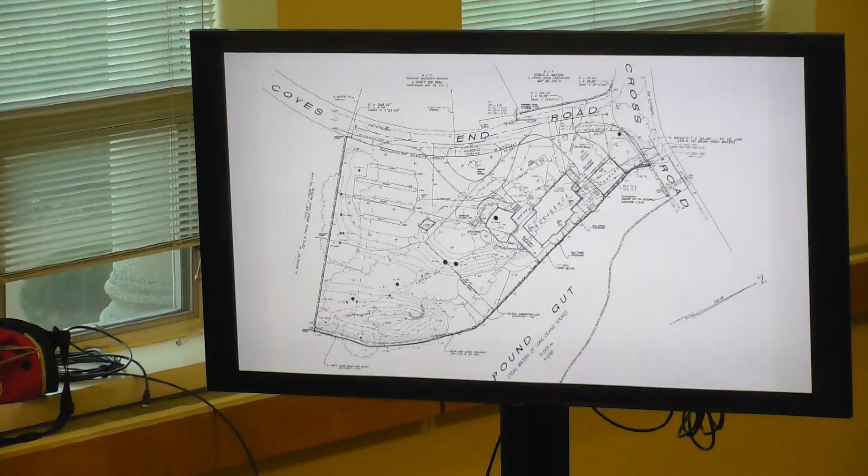This is the survey, and I have a detail of what this looks like a little later. You can see it is a roughly triangular-shaped lot. The residence, which is old and predates zoning, is very close to the water line, and the property line is the water line at this edge, which is Pound Gut. It is towards the tip of the triangle at the intersection of Coves End and Cross Roads.

I have some existing floor plans of the lower level - this is the basement ground level, which leads out to the driveway right here. This is the first floor, which is the principal living floor, and then the second floor where there are bedrooms, etc.

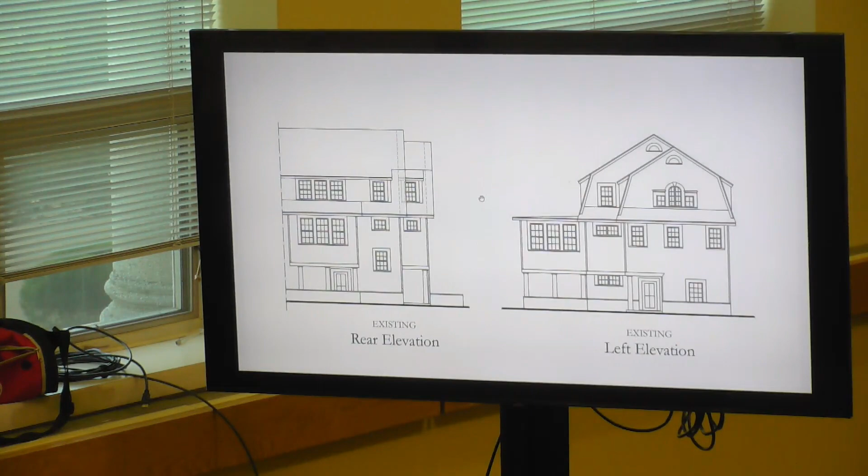Existing elevations, which we can come back to for reference, and then a zoning chart.

On the zoning chart, the interesting element is that between the existing and proposed there is no change, including the side yard, which is currently 0 feet. We are not proposing to change that, but we would like to build that small addition 17 feet away from the property line.

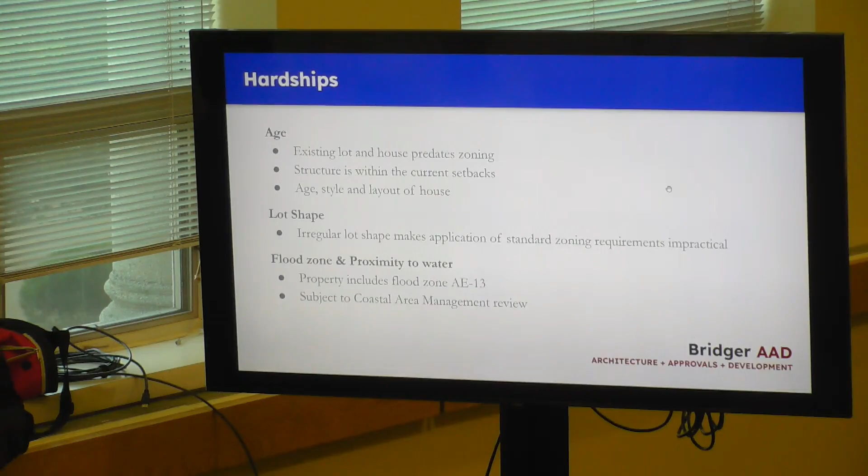The hardships, as I mentioned, are the age of the lot, which predates zoning. The structure currently exists within the current setbacks, and it's an old house. We looked at options for where to put the elevator, but given the existing layout, the character of the house, and the substandard basement, it would be difficult to get circulation to an elevator anywhere else on the house as it stands. I have some photographs of that as well.

It is an irregular shaped lot, nearly triangular, not actually triangular but pretty close. There is also some flood AE 13 zone — actually the whole property is in the AE zone, subject to coastal area management, which, if we get approval here, we are on their agenda for as well.

Our requested relief, as mentioned earlier, is to be able to build at 17 feet instead of 25 feet. It is currently 0 feet from the property line — the house is on the property line in some cases.

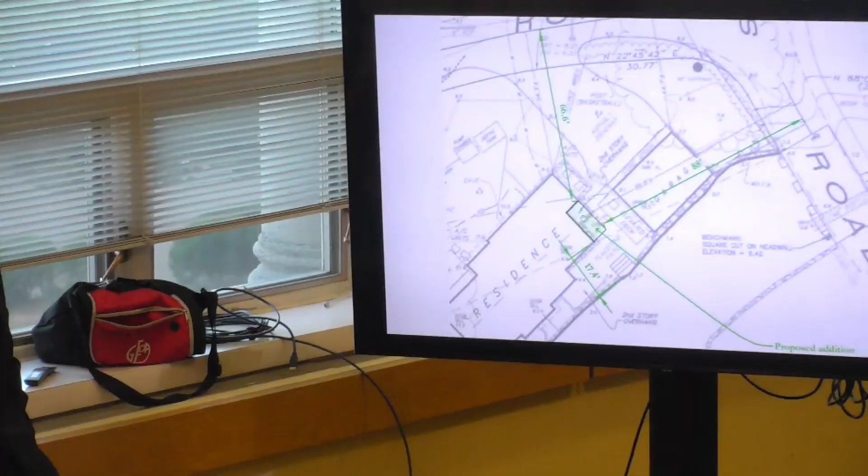This is a blow-up of the area on the survey, and you can see what's going on. There is this little open corner, and we'd like to fill it in to accommodate the elevator and staircase. These are my dimensions, not as precise as the surveyor's, but approximate — about 17 feet here, roughly 88 feet to the center line of Cross Road, and 66 feet to the center line of Coves End.

Woody, one of the comments — and I'll bring this up later — one of the comments Woody expressed on my drawings was that it wasn't exactly clear what we're looking to propose, so I'm going to drive that point home with a couple slides. Let me know if you get bored.

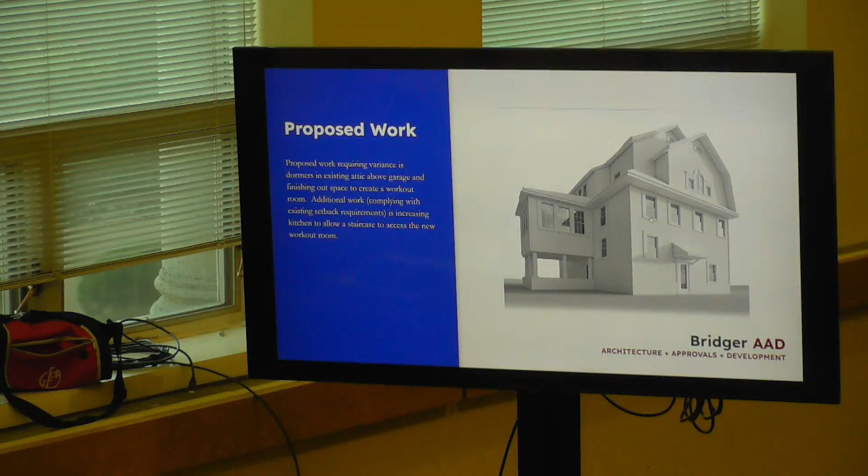These two windows are basically in the staircase, and the elevator would be where the existing staircase is now. A couple of floor plans depict this further — elevator here, new staircase wraps around.

This is the driveway, or ground floor, or basement level, whatever we'll call it. The first floor plan shows the kitchen and main living area.

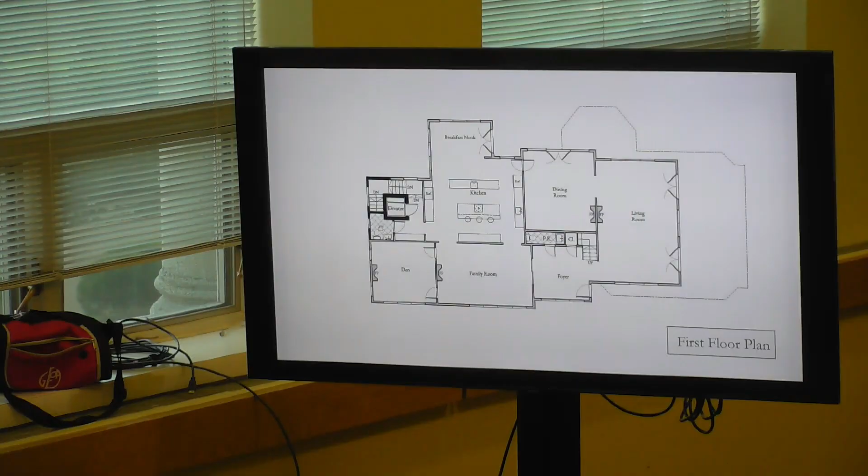We have to reconfigure an existing powder room, which is approximately there now, but we're tucking the elevator in and wrapping it with the stairs. That stair does not come up to this floor — there's already a staircase here if anyone needs it, so we're not duplicating that. But we would like the elevator to get up here so the homeowner could get access to the bedrooms.

Is this home FEMA compliant now? Is this home raised? No, it is not.

Do you have an estimate on this total project? The elevator project is about $100,000 or $80,000, something like that. Okay.

Sorry, I think we're almost done. But this is the proposed elevation. So basically, this L here would be new, and this would be new.

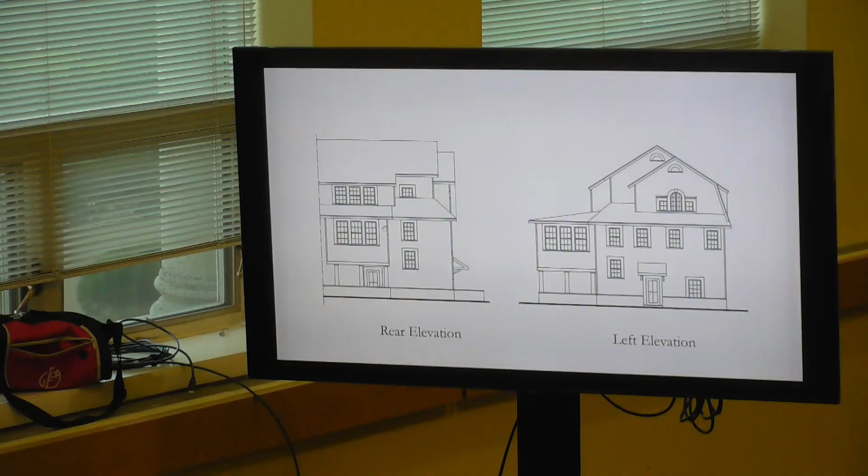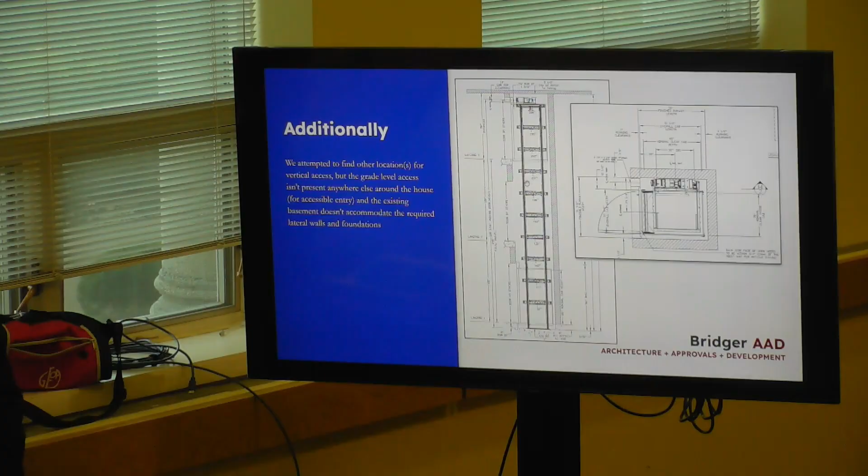Just a final point: given the technical nature of an elevator installation, we need appropriate shear walls, structurally sound, that can manage the push and pull, especially on the rear wall. This would be connected, and there's just nowhere else I can figure out how to do it on this house.

Staff gave two questions, and the first is the house sits very close to the water, and was asking about the depiction of what we were requesting on the plans. Hopefully this is a little bit beyond what you guys have in your package, but I hope this clarifies what we're actually trying to get approved, which is the addition for the stair.

The last question was the closest neighboring house appears to be 22 Searles. Are there any potential negative effects from the proposed addition? My response would be, I don't think so, because there's already impervious patio there.

We're not increasing the impervious surface. It's difficult to see this from any real street perspective. We don't think this affects anyone negatively in any way, shape, or form. And that's it, thank you. That's my presentation.

Any questions? In terms of the standards we need to identify under state law and local zoning, one is that there's something unusual about the property, and I guess what I heard is the irregular shape of the lot. The house was pre-existing, right, and you're right on the water, et cetera.

But then the next step is that that unusual configuration of the property creates a hardship. And what I sort of heard was accessibility, something like that, but can you elaborate on why, if we didn't grant you this variance, that would create some unusual hardship related to the use of this property?

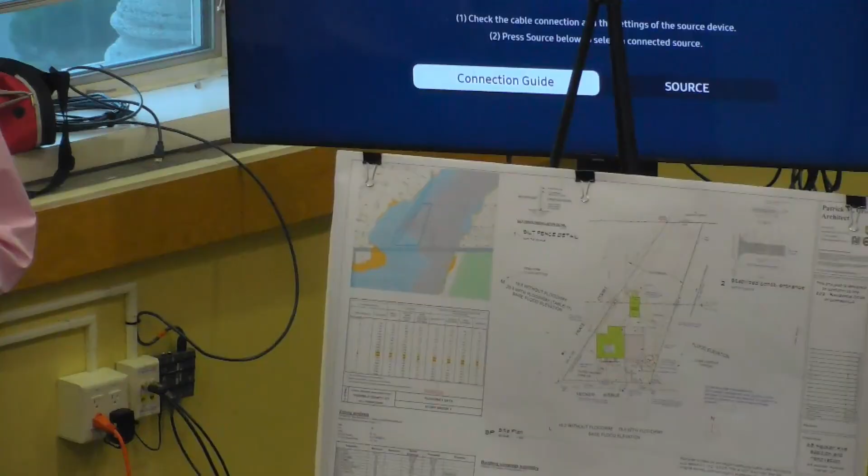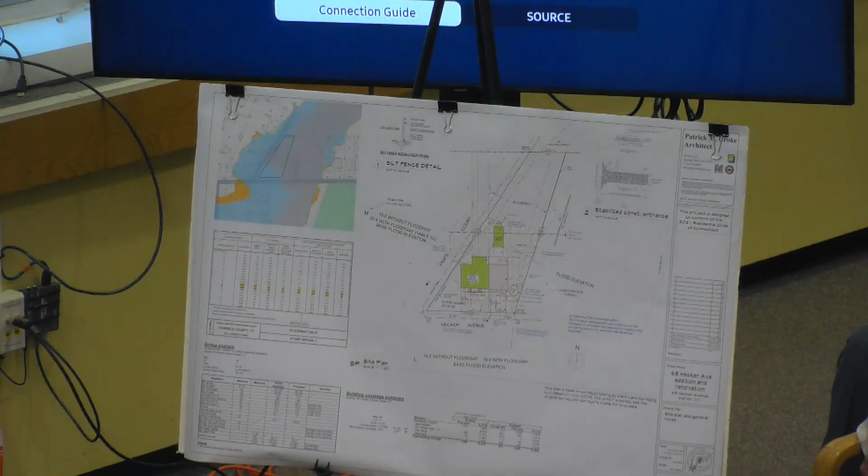The lot itself is a very unique lot on this street and in this area. It's a tapered lot with Hecker on the front yard portion and Friet, a small road, on the left side. Friet is essentially a large driveway, but it's considered a town road or a public road. So the setbacks from the center line of that road come well into the property.

Nothing can be done on this property that's not in the flood zone without a variance.

What we're looking to do with the house is to create a second story. The current house is a 3-bedroom, 1-bath house. The new house proposed is a 4-bedroom, 2.5-bath house. The 1,250 square foot first floor plus the finished basement totals up to about 2,500 square feet.

The proposed renovated house with the additions is approximately 3,000 square feet plus the garage, so it's not much larger than what was there originally. We're just trying to replace the area that was lost in the basement, because that needs to be filled in and brought up, so it's no longer a usable basement to meet the flood regulations.

We have an application into the Planning and Zoning Board, but they requested that we come here to your board first to apply for the variance.

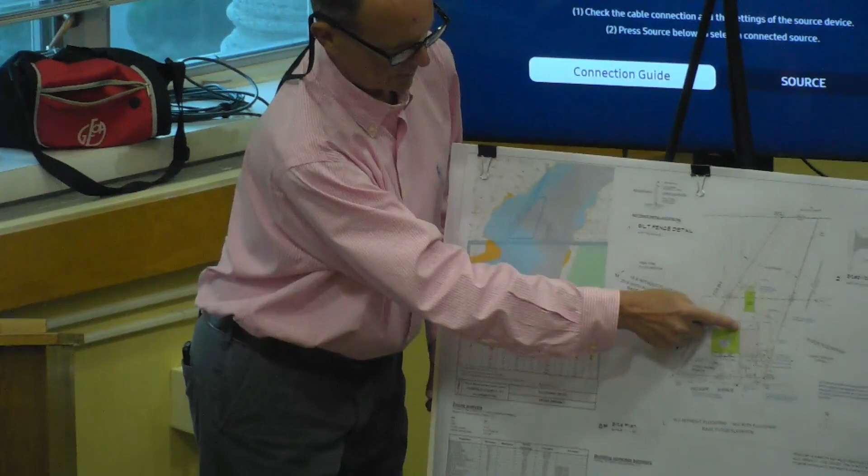The existing structure is shown in green, and we're proposing a second story above all of it except for the bump out in the back. The hatched area is the garage with a living space above it. This smaller hatched space behind it is a first floor deck.

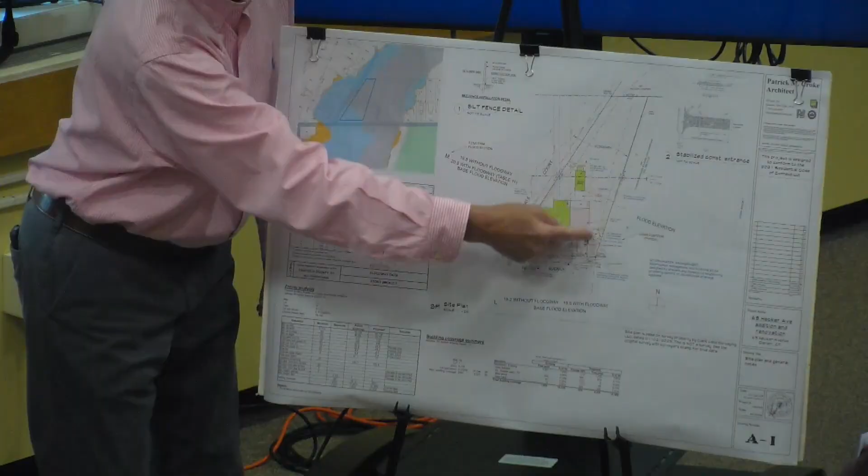The existing garage behind the house is being removed and restored to a lawn area. The orange hatching shows the flood area. So any additions on this other side, which may not require a variance, would push us into the flood zone where we would not be able to meet the 0.00 flood rise restrictions.

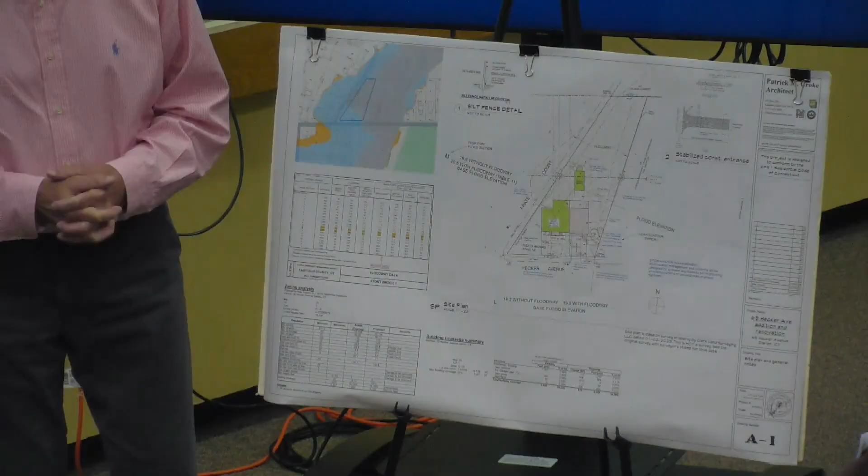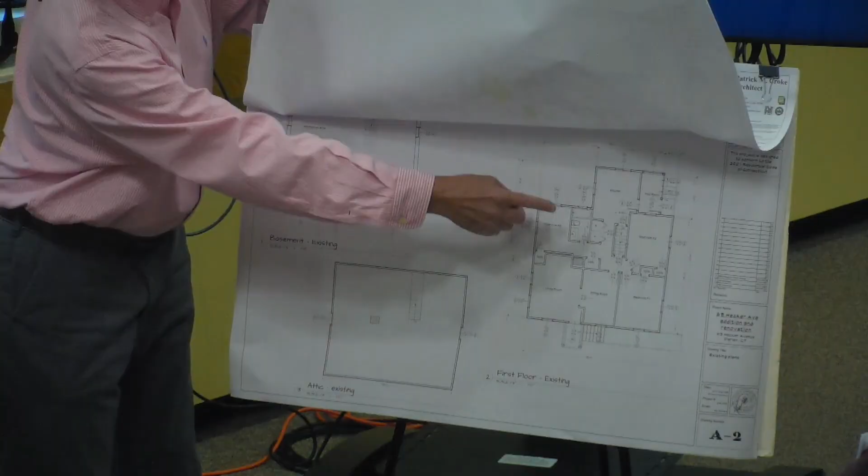In our package, we've included the existing floor plans. As you can see, this is the finished basement, which has a fireplace down there. It was used as a playroom, and the first floor has 3 bedrooms and 1 bath. The attic was just an unfinished storage attic.

The existing elevations, again, you can see from the photographs, it was a modest house. Patrick, did you guys look at just tearing this down and starting over? It was discussed.

Mr. Rahman decided to pursue this option. I think tearing it down and reconstructing it would put us more into the flood zone and have higher restrictions on that. That's what I can't tell. I can't tell if it does. It looks like the buildable area is there for you, but I can't tell on this where the flood zone hits.

John, can you tell? There's some survey from our documents that may be clearer. It looks like I think it's all the red area here.

Am I interpreting this correctly? So the entire thing is a flood zone? The entire thing is the flood zone to right here. All that red? That's what I want to understand. So all of this is flood?

It may be clearer on this photo. I believe so, yes. So if that's the case, Woody, keep me honest, I think that's correct. So then you're looking at our buildable area is now this.

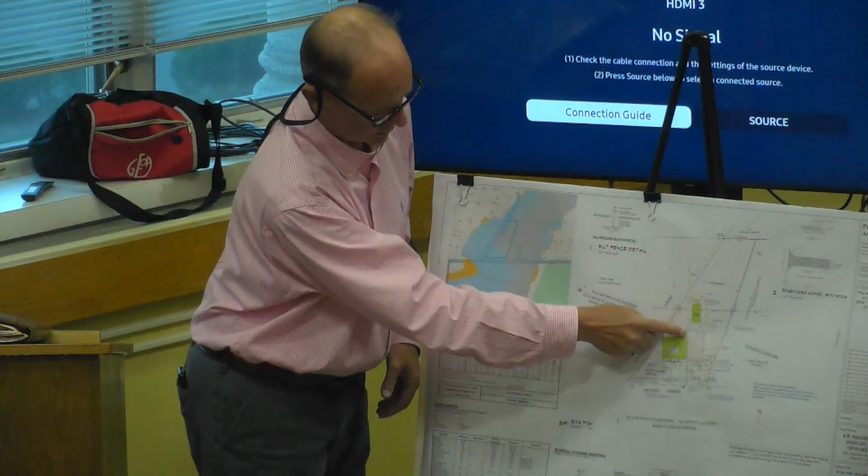You can see on the survey and the site plan where the line is - a little more than half. So of the square footage of the house, from this corner to this corner, it's about half, so 1,250 is the house, roughly half, so let's call it 600 square feet.

But is the basement legitimate, like property card square footage? Is it finished? Probably not, right? It can't be. Maybe it is, I guess I shouldn't say it can't be. There's, I guess I'm trying to understand if it's 1,200 feet, and even if the basement is legitimate or not, or somebody just refinished it, it's irrelevant.

Even if it's 600 square feet, that's 1,800 square feet, and this new house is what you said, about 3,000, little under 3. And this is a 16,000 square foot lot?

Okay. Did you speak with any of the neighbors about what you guys are doing? I did not. Did you speak with any of the neighbors? Okay. Obviously, they all received notices. We offered in our cover letter with the notices that they can reach out if they have any questions, and we did not hear from anyone.

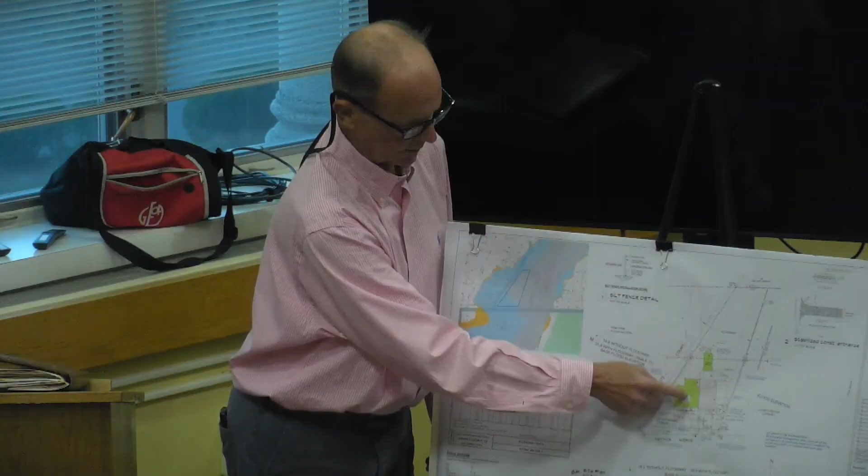And have you looked at making the second story setback to... We looked at options for relocating that second story, bringing it back in this way, but then it pushes out this way, and you end up with a similar situation back here where there are fewer trees. I think it's more screened in here. Plus it's an awkward-looking house with the two-story section that bumps down, then an addition off the back.

So it's choppy. So you could add the second story and get it out of the setback? No, you cannot - it does not go out of the setback, because it would be back in here. Oh, should be okay. Back in here, so it still requires a setback variance. We're gonna have to go above this, which we're not now. Is that going away? No, it stays, but it stays as one story. Oh, this is a two-story here. Okay.

I think you could get a second story there. Okay. Want to say this?

Randy, anything else? Could you just summarize again the hardship points? The hardship is the shape of the lot - as it tapers to a smaller section in the back, the setback on this side comes in more as you go back. Freight is a very narrow street, which pushes the 50-foot measurement from the center back well into the property - that's through half of the existing house. The flood issues, including floodways, that's moving water. The water moves at 4.2 feet per second, as per the code here. It's just under the 5 feet, which gets us into a more restrictive flood zone, but it is still a moving river that we need to deal with.

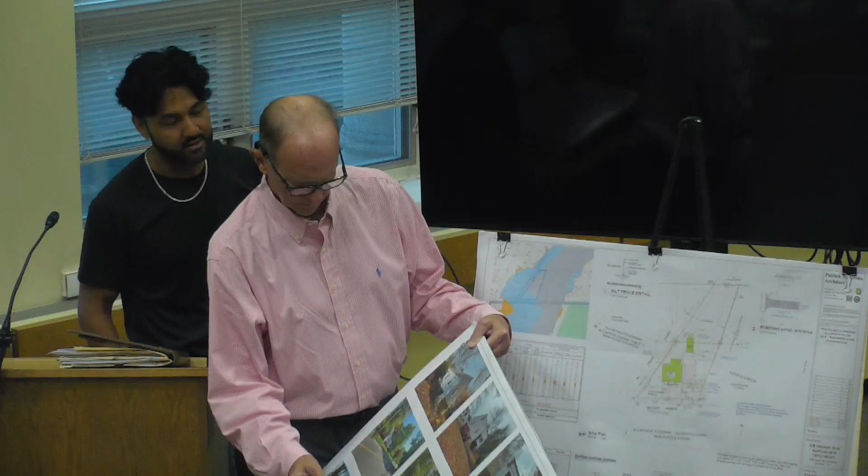He's asked to show where the door is located. It's described as an actual walkout door, smaller than full size, not like Bilco doors. It's confirmed that this door enters at the ground floor of the basement.

A board member asks about stairs going up near the door, noting that to bring in tons of crushed stone and concrete for the new 4 inch slab, you'd have to go up 5 stairs. The builder clarifies that actually you're going down 5 stairs from that door, not up.

A board member jokes that the builder would know since he's a builder. The builder clarifies he's not a residential builder. The board member says he's 100% correct that it's not an easy task.

The builder asks the board for clarification: where the new stair is going at the front, if they cut a hole in the foundation there and patch it back in as part of constructing the stair, would the board consider that a reasonable option? Another member suggests John may not care about that, just that it's a big fill.

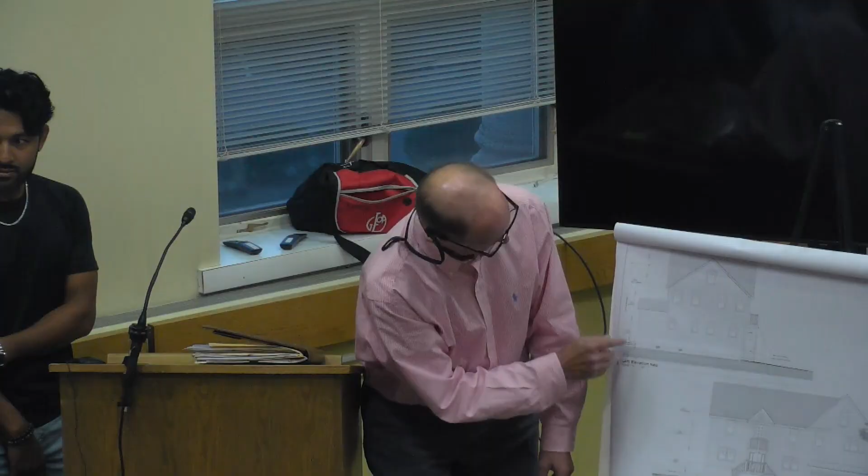So this is it, it's 29/2. Looks like this is dated 6/14. Right, but then we had the surveyor update the average grade, and it came up a little bit from what we had assumed. Okay.

All right, while you have that elevation up, there's a feature over the garage door that's a little bit in the front setback. If that's an issue, we can come up with other options. We're just trying to break up that mass between the top of the doors and the bottom of the windows. It's higher than normal because of the height of the garage.

But we can come up with other options if that's an issue with the setback. Okay, pay attention - can you, and maybe the rest of the board is clear on it and it's just me, explain the further hardship with the flood zone by rotating and putting the house in? I get it, it's still in the flood zone, but putting the house in the zoning buildable area, what is the further hardship versus building in the flood zone right now? I'm not clear on that, maybe you guys are.

The more construction you put in that flood zone, the higher it raises the water, that's the simple answer. Okay, so what is the impact specifically to your project then? Is the impact that they say no, you can't build this in this buildable area? Correct, if we're above that 0.00, we cannot build it. That's the only option - you'd have to raise it more, or they can say no, you can't build it.

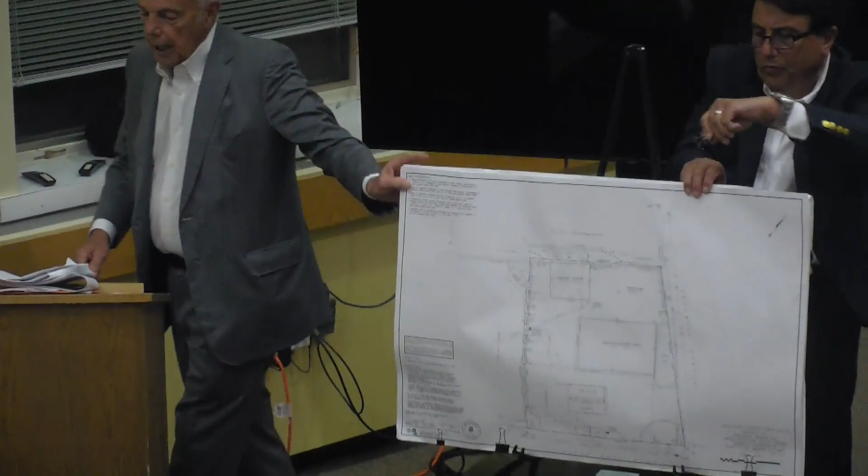Here, and you have an existing garage in the back. The existing garage is an additional 1,020 square feet, so that on the site right now, there's 3,750 square feet of building area. The storage building, which is at the rear or northerly portion of the property, is between 2 and 3 feet from the rear property line as it exists. So it's certainly within the setback area that exists back there now.

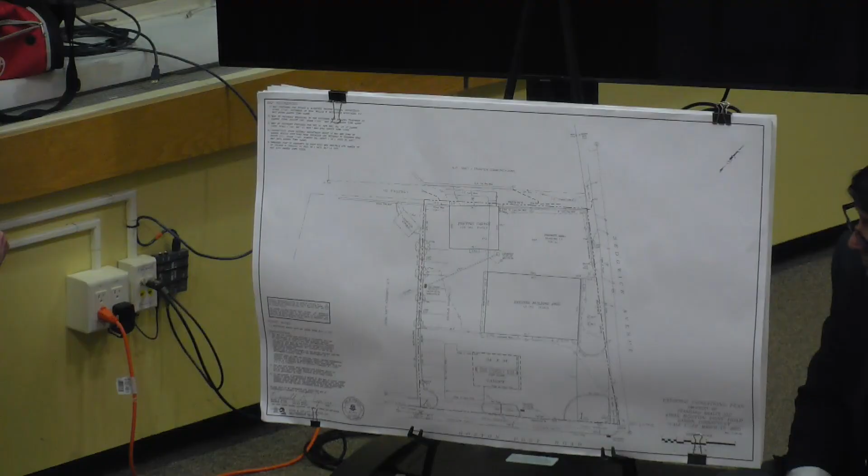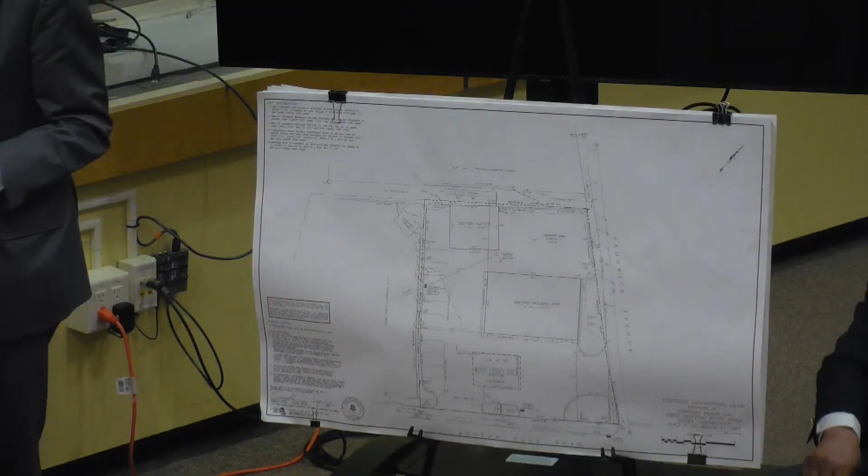And I want to point out that on the site, and even in the picture that Woody attached to his report to the Zoning Board of Appeals, you can see there are existing 3 pumps. It's not 2 pumps as was shown and indicated on some of the plans. The canopy that's there is now 816 square feet. And it's noteworthy that the district to the north of the parcel, although it is a residential zoning district, it is owned by the Frontier Communications Corporation, and they have a building there that's used for commercial purposes, and quite honestly, it will continue to be used that way into the foreseeable future, which has an impact in terms of evaluating how this lot is configured.

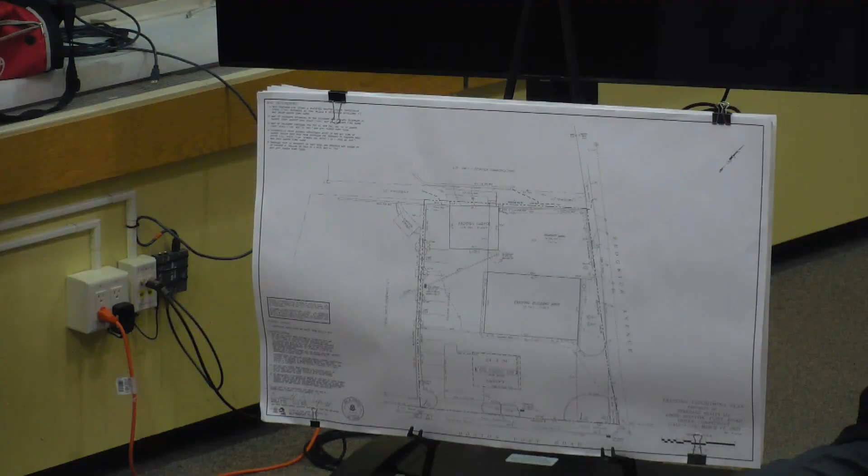I think the impetus for the proposal before you and the intent to remodel is that the operator who is there now is about to exit. There will be a new operator, and it's an opportunity to create what honestly will be an aesthetically much more pleasing construction on the site.

It will be safer, it will enhance mobility on the site. The proposal is to have one building of 2,800 square feet, which is a reduction in the square footage of the 2 buildings that exist there now. It's also a reduction, as shown on the plans, on the coverage of the buildings.

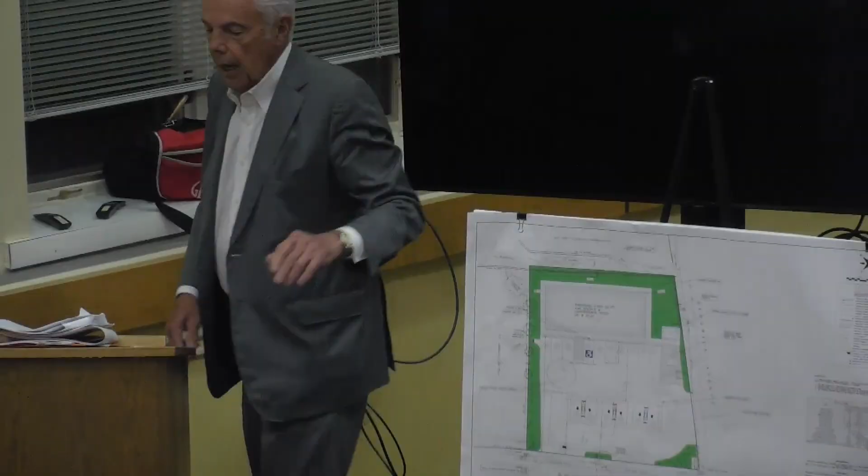The building being proposed would be 15 feet from the rear property line, and the site as proposed would have 16 parking spaces, and it's required to have 14. It would continue to have 3 pumps, and it would have a canopy of 1,621 square feet. However, the existing canopy is what size again? 816. Right, so you're doubling the canopy.

But the increase in the canopy is less than the amount being taken away with the 2 main buildings. The square footage in terms of overall coverage to the site is being reduced modestly, and the number of pumps is not increasing.

Correct. Right now there's 3, but you can't really use 3, you can only use 2. It's terrible, with 3 on a small island you can't park cars on either side. That's correct. They reoriented them though. Oh, they have? I don't go there anymore because it's terrible.

Yeah, they reoriented them, which I think is... so I assume you're going to speak to the safety aspect of that. I'm curious about that when you say it's going to be a safer layout.

So we're going from 2 buildings on the site to 1. The square footage of the building is reduced by some 950 square feet, and the coverage goes from 20.2% to 14.8%.

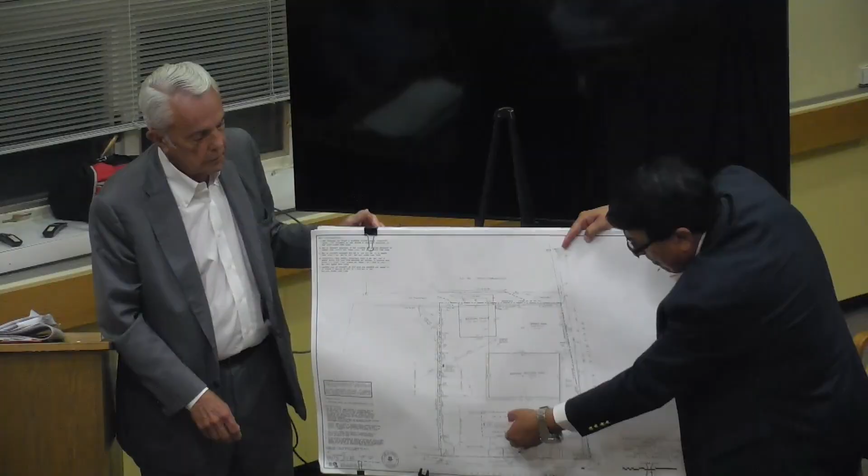Right now the pumps are... my name is Nadeem, I'm the applicant. Right now, actually the pumps are pushing back. The reason we had a preliminary discussion with the town, they are clustered to push the building back, so the pumps can go a little more back and it can be more conforming. So basically pumps are pushing back at least another 8-9 feet.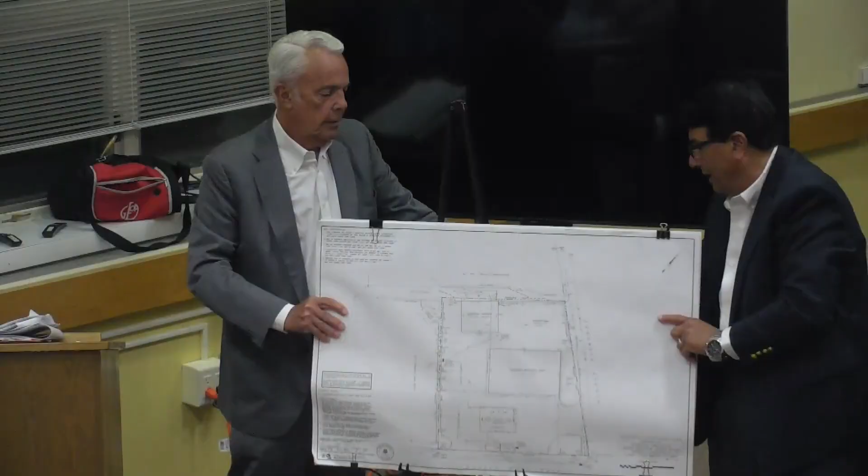Do you have the actual dimension now of how many feet it is from the post road? I see, 24 feet on the proposal. That's not from the property line, that's from the landscaping. But I can see generally based on that what it is, the point is it's an extra 8 feet back, whatever the right number is. So it's just moving back, so there is no issue, and it's a more safely manner.

And how close are they to Sedgwick? Right, they're gonna get closer to Sedgwick, 23.2 feet versus, I presume, yeah. Nadine, one of the things we don't see, usually we'd request a traffic study or something. Would you consider a curb cut on Sedgwick? I may be getting ahead of us, but have you ever gone through that intersection during peak time when traffic is coming out of Starbucks and kids are coming through for school?

There is a curb cut from Sedgwick, and you pull right out into the traffic light. And then you sit there.

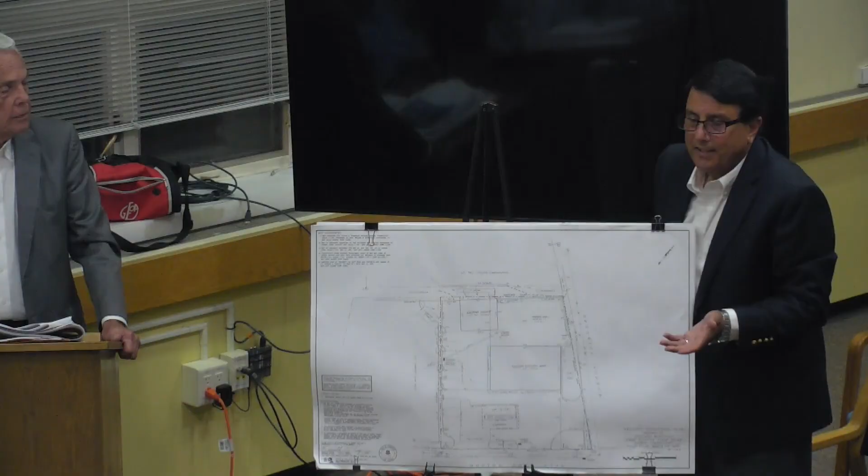Is that something you're considering, doing a higher curb cut maybe closer to the Frontier building? Honestly, the way I've visited the site and observed it, those curb cuts can be easily maneuvered by all the customers to get in and out, the way it is with the existing layout.

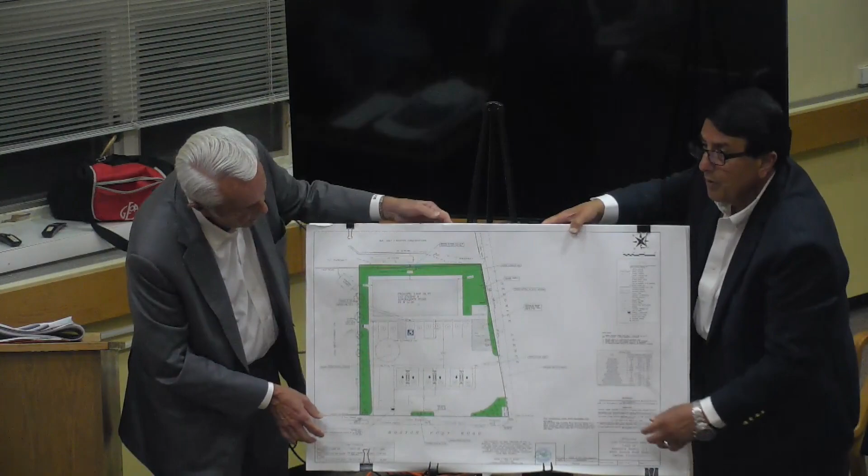If you flip that over to the other one - no, this is only the existing, everything is the existing curb cut. But this is the new one. They've really changed it, look at the highlighted green on Sedgwick at the bottom and the top. Do you think those are better?

Yeah, I do. I think reorienting the pumps - when I first very quickly looked at this, I was like, way too close to Sedgwick, unsafe in manner. But the way they've reoriented them now is much different. That's why we made that dive-in, so people can get in and out. It's better traffic flow, much safer, and on top of that, more ADA compliant.

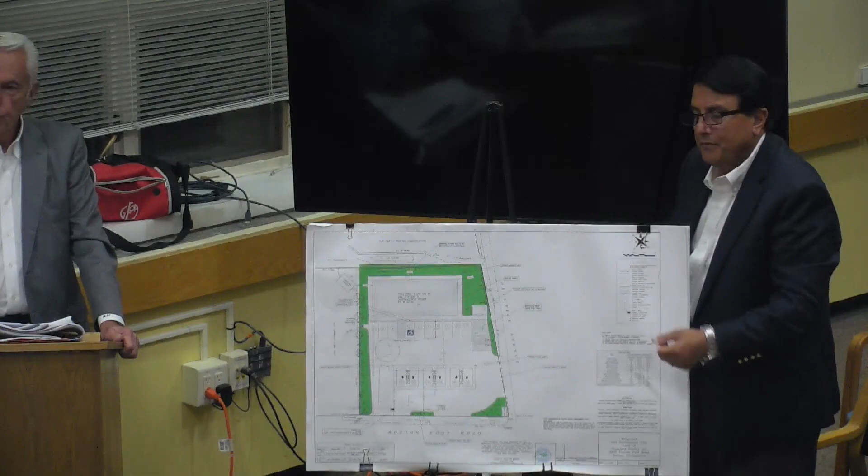Would planning and zoning and/or ARB require a traffic study as part of their review? They might. Prior to tonight's meeting, I had a discussion with my client and advised them that at P&Z, the traffic issues are likely to be discussed, and we should get a traffic study.

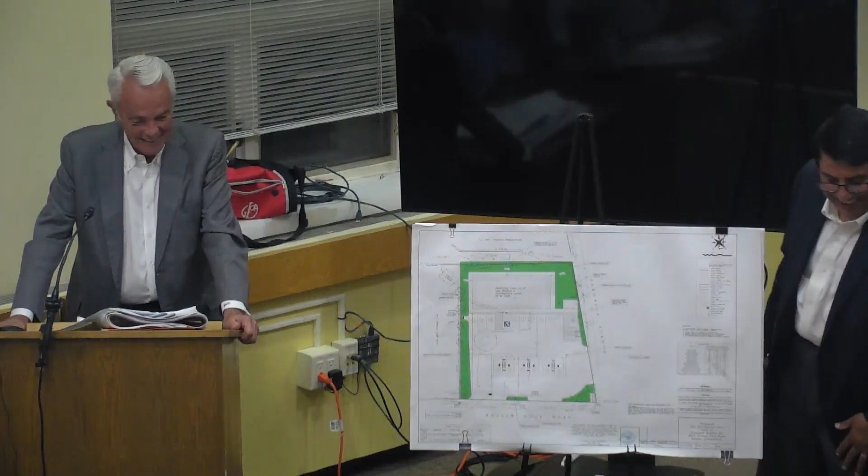Will you remove the boats that are 30 years old in the backyard as part of this plan? You got to come up and give us your name. My name is Mark. The boats are supposedly sold. Everything is supposed to be gone. I'll believe it when I see it.

What about all the tow trucks that sit out front? Oh, they're all gone. The for-sale signs that people were concerned about, all gone. Everything is going to be out of there. I knew that was a concern, obviously, before.

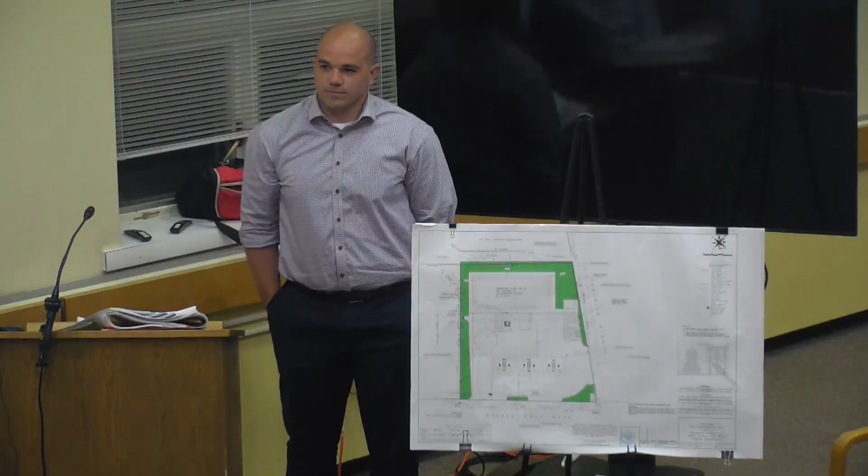So that green part in the back is not going to be used for storage or anything else? No, absolutely not. It's just open space, green. And we'd be happy to make that a condition.

You will see a new gateway to Darien, I promise you. When you come to cut the ribbon, whatever we are telling you is going to stand exactly the same. And we did speak to one of the traffic engineers - he basically looked at the plan and suggested we leave everything the way it's going right now. But if you guys wish, we can have something in writing, some detailed discussion as well.

Our intentions are to have this thing as safe as possible. When you see it, I can literally see it in your eyes - I've checked the way it is, a very unsafe condition the way it is now. Once that tenant is gone, trust me, this whole mess is gone, you will see a new world here.

I'd love for you to sell it to Starbucks so they could just make a drive-through there. That Starbucks is a nightmare.

How many parking spots are there now that are actually aligned? I don't think you can count that. I would say six, eight, maybe - probably, no, I would say 12 to 14, going the whole way down that side. Never mind what's behind the property as well.

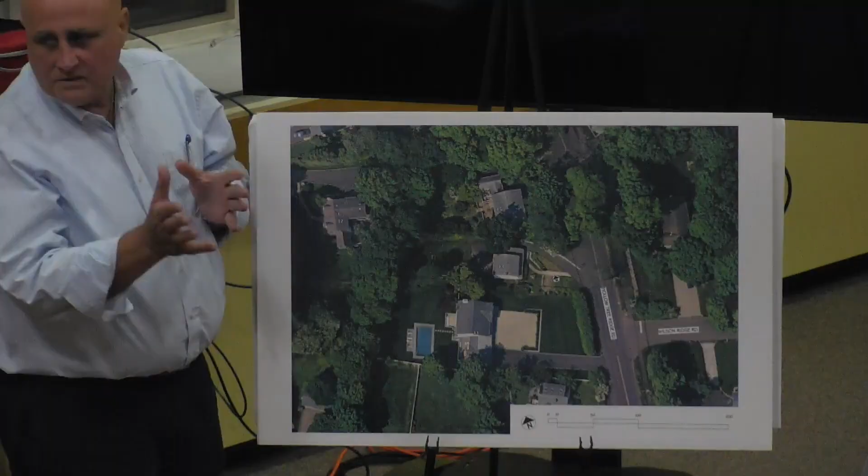And we're trying to push back the new house within the setback. So basically a basement, ground, and a second floor.

Why are you keeping that though? The idea was if you demolish it completely, it's not possible to build because it's non-conforming. In discussion with zoning, we cannot completely demolish - you need to keep a certain percent, not cut it all down.

No, right, like that's why people leave just the chimney when they demolish the house. Really? I mean, no. It just seems like an awful lot of work - an awful lot of work for a little deck, right? Well, the foundation's there, we just have the foundation there existing.

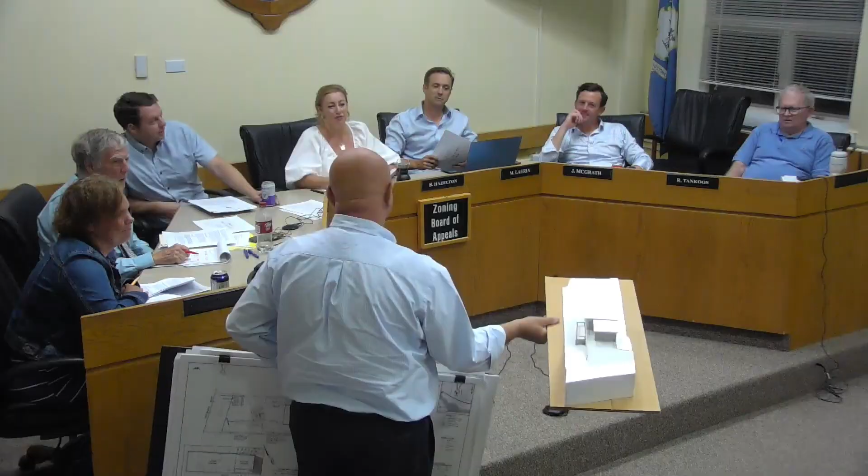How long did it take to make the model? It was 3 days. 3 days? It's not just a 3D printer? No, it's handmade. Oh wow, what is it made of? Just foam board and an X-Acto knife, and chipboard. We're trying to reflect... see the white one? I hope you save that, I hope you don't throw it out. No. Oh, it's really cool. Those are the glass case. Very helpful, thanks so much. Yeah, thanks, sorry to keep you so long tonight. Yeah, you guys did great.

That's making the most of that lot. Yes, it is, it really is. Super cool, thank you. We don't meet until September again.